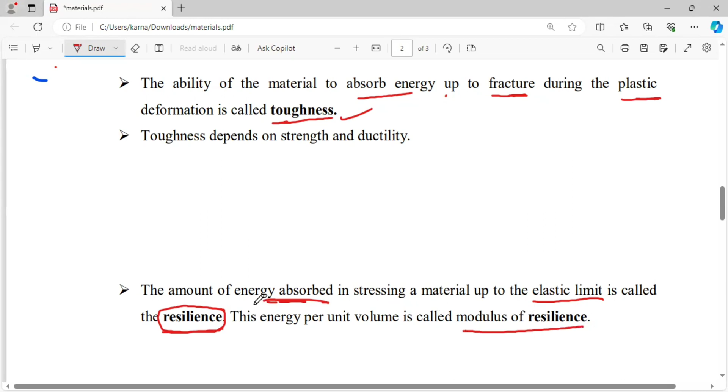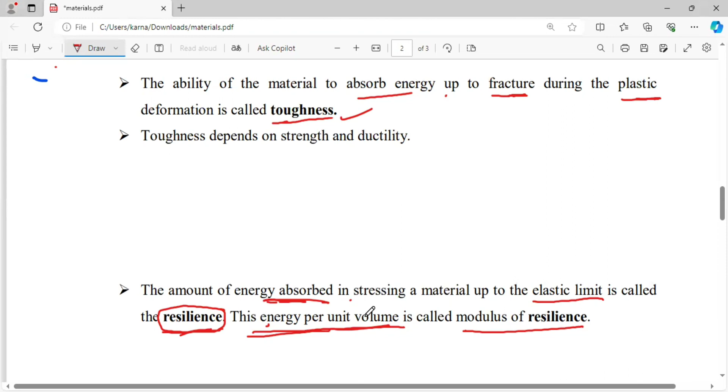That means the amount of energy absorbed by the body is the resilience, and the absorbed energy per unit volume is called the modulus of resilience. Modulus of resilience is nothing but the amount of energy absorbed per unit volume. It belongs to the toughness property of that material.

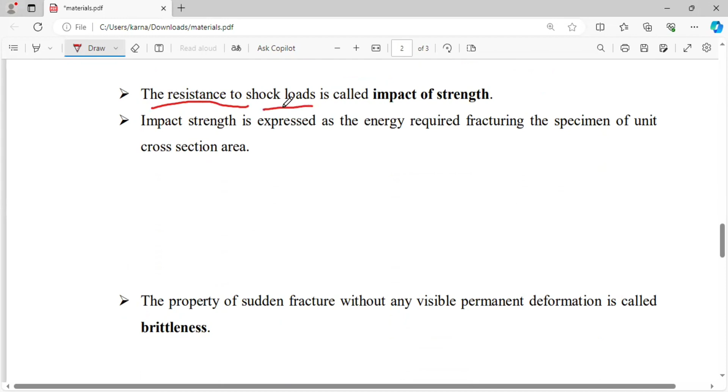After that, in some examples, some loads act suddenly on a body. The resistance to shock loads or sudden loads is called the impact strength. That means suppose a load is applied to a body at an indeterminate time. If you travel on a bike and suddenly there is a speed breaker, it will give some shock loads to our bike. Like that, some examples are there.

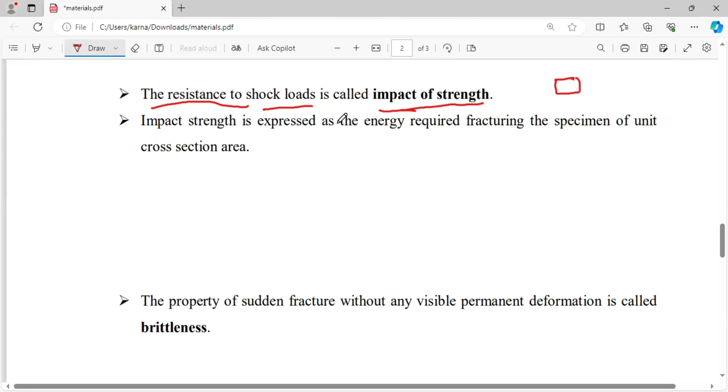The resistance to shock loads or sudden loads is called the impact strength. This can be calculated using the energy required for fracturing the specimen of unit cross-sectional area. Impact strength can be represented by the letter I. That is the energy required to fracture the specimen per unit area.

Impact strength can be calculated using the relation energy per unit area, where energy means the energy required to fracture the specimen. Energy has units of joules, area has units of meter square. So it has units of joule per meter square.

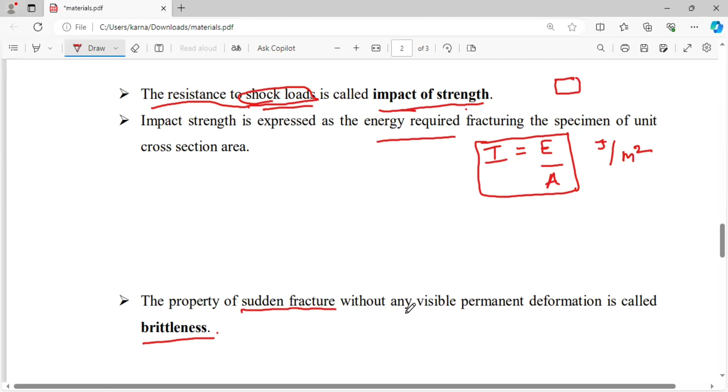The next property is brittleness. Brittleness means the property of sudden fracture without any visible permanent deformation. That means the deformation cannot be seen by our naked eye. There is some deformation that cannot be observed by the human eye, but the fracture happens suddenly. The property of sudden fracture without any visible permanent deformation is called the brittleness of the material.

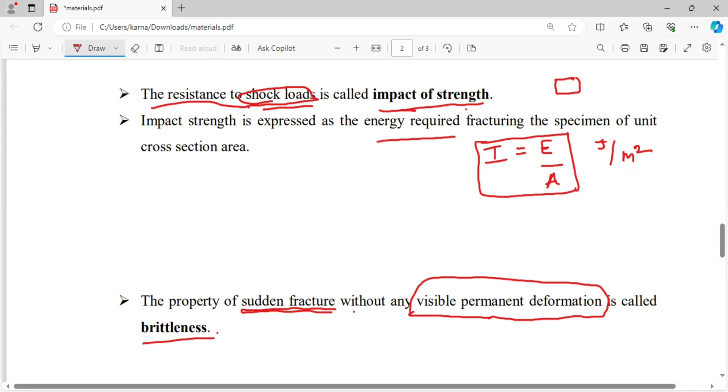Next, hardness. For hardness, I will consider an example. Suppose you consider any body, any object, and on that object I consider a hammer. With the help of the hammer, I strike that body.

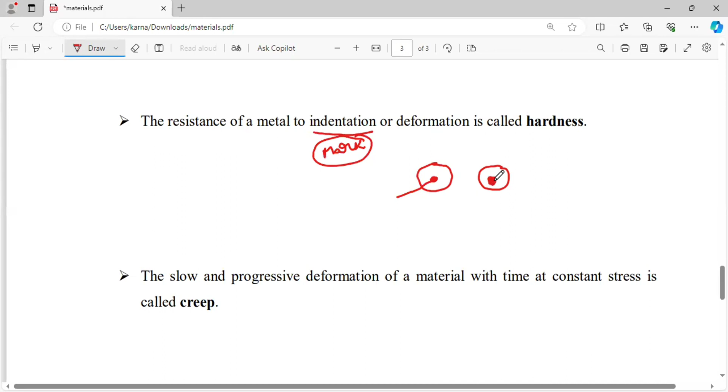When a sudden load or pressure is applied on a body, some indentation occurs on that object. Indentation is nothing but the mark that will be acting on the body due to that load. This property is called hardness. By definition, the resistance of a metal to indentation or deformation is called the hardness of that material.

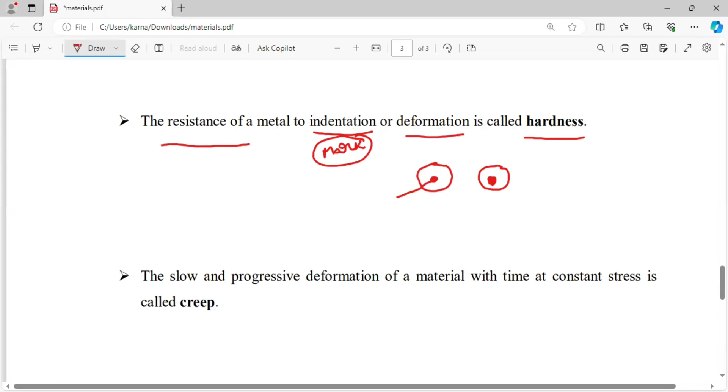Next, creep. Creep is nothing but the slow and progressive deformation of the material with time at a constant stress.

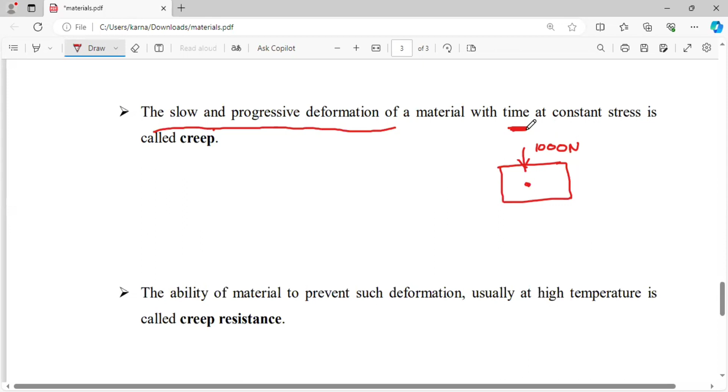Suppose I consider an object like this. On this, I am applying 1,000 newtons of force. The force is constant, that is the stress is constant. Suppose I am applying this for 1 hour duration, 2 hours duration, and 24 hours duration. So in the entire day, that 1,000 newtons will be acting on the body.

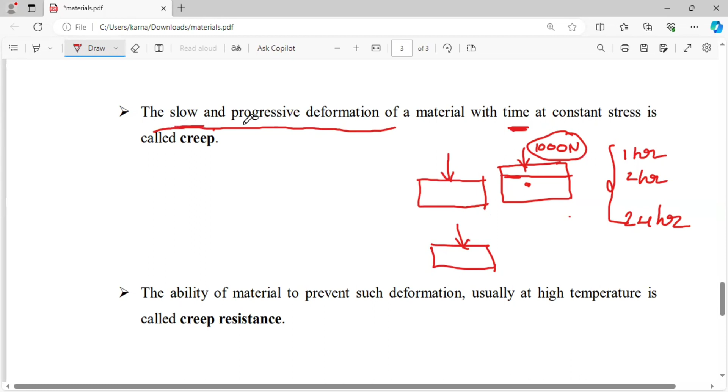Due to this time progression, the body will deform like this. After 24 hours, the body will deform like this. After 48 hours, the body may be further compressed, but the load remains constant while time varies. That means the deformation is slow and progressive, where progressive means uniform deformation. So, slow and progressive deformation of the material with time at constant stress is called creep.

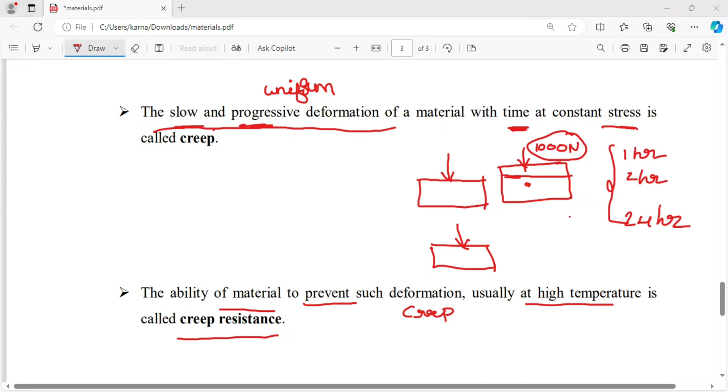To prevent creep at high temperature, that property is called creep resistance. The ability of a material to resist creep is called the creep resistance.

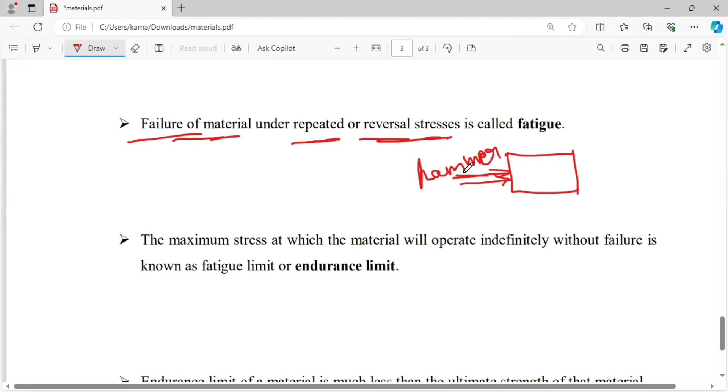Next, fatigue. Fatigue is nothing but failure of the material under repeated or reversal stresses. Suppose a compound wall is there and I want to dismantle it. I apply force with the help of a hammer repeatedly, applying the same force or different forces at some particular point. Then the material will be damaged. That means failure of the material under repeated or reversal stresses is called fatigue.

Next, one more parameter, not a property: the fatigue limit or endurance limit. Fatigue limit or endurance limit means the maximum stress at which the material will operate indefinitely without failure.

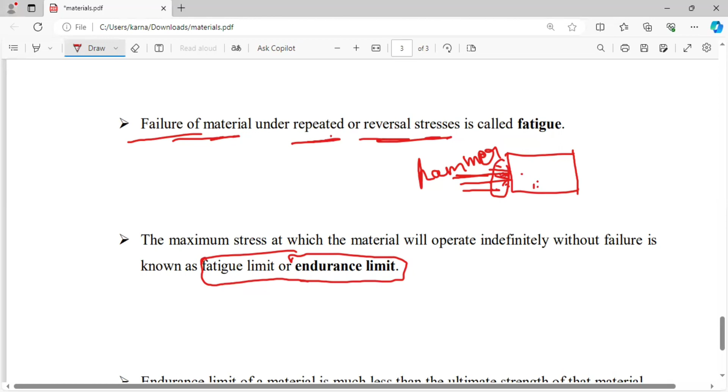Here we are applying a number of reversal or repeated forces on the body. We look at how much stress is applied before failure occurs. That limit is called the fatigue limit or endurance limit.

One more important point: the fatigue limit or endurance limit is less than the ultimate strength of the material. The endurance limit of a material is much less than its ultimate strength.

So these are the important mechanical properties of materials. This concept can be used for both subjects, strength of materials and engineering materials, for mechanical engineering students, whereas this topic can be used in strength of materials for civil engineering students.

In the next video, from an examination point of view, especially competitive examinations, we will discuss how the questions will be asked on this topic.